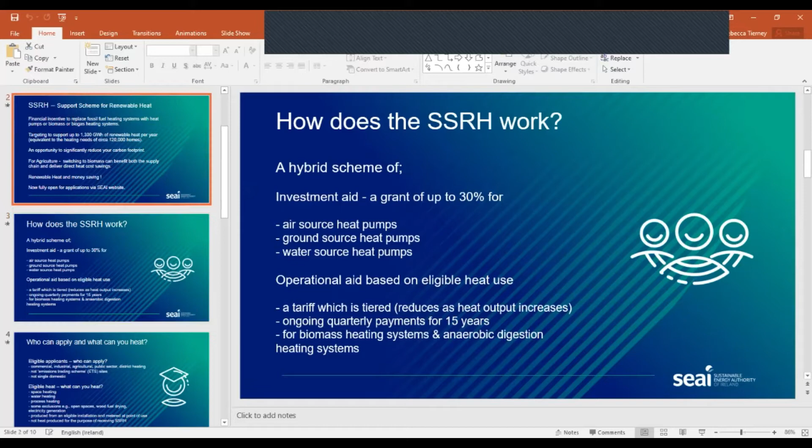So what is the support scheme for renewable heat? It's a financial incentive to replace fossil fuels.

So basically, for all you folk on the call today, if you're using fossil fuels, LPG, kerosene, anything like that, this is an opportunity to move away from fossil fuels and move to renewables. It's targeting a particular size, 1,300 gigawatt hours of renewable heat per year, which is equivalent to about 120,000 homes, or about 3% of our heat footprint. So it's a fairly substantial intervention. It's not going to be the be-all and end-all of all the heat needs in Ireland, but certainly it's a large portion of the heat, and it's an opportunity to significantly reduce carbon footprint.

For agriculture and poultry in particular, who are on the call here today, switching to biomass can benefit both the supply chain and deliver direct heat savings. So it's renewable and saving money at the same time. It's open for applications. My colleague Denis is going to take you through the application process in a few moments. But let's move on. Rebecca, next slide please.

There's actually two elements to the SSRH. We call it a hybrid scheme. There's grants for heat pumps, or there's what we call operational aid, or a tariff payment for biomass and biogas. I'm not going to talk a lot about the heat pumps here today, just to note that they're there, and perhaps we'll just park them for today.

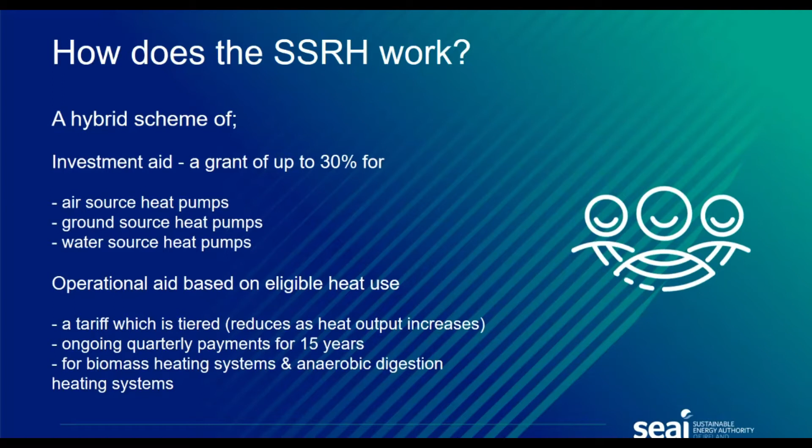Really, what's of most interest to people in the poultry sector is around using biomass, and for that there's a tariff. It's tiered, in other words it declines with size, and in essence it pays for 15 years on a quarterly basis, for biomass heating systems or anaerobic digestion heating systems. Next slide please, Rebecca.

So who can apply and what can you heat? Basically anyone in the commercial, industrial, agricultural, public sector, district heating schemes. So not big companies that are in the ETS, emission trading schemes, and not single domestic, so not individual houses or apartments. So certainly anybody in the poultry sector on the call today are eligible.

What can you heat under the scheme? Most things - space heating, that's heating rooms in hotels or offices, water heating, process heating. There are some exclusions, such as open spaces, wood fuel drying, or heat used for electricity, and not heat produced for the purposes of SSRH. So if there was never heat used for something before, just because SSRH is there, we're not interested in generating new heat sources. It must be produced from an eligible installation, and because you're going to be paid for the heat that's used, it has to be metered at the point of use. Next slide.

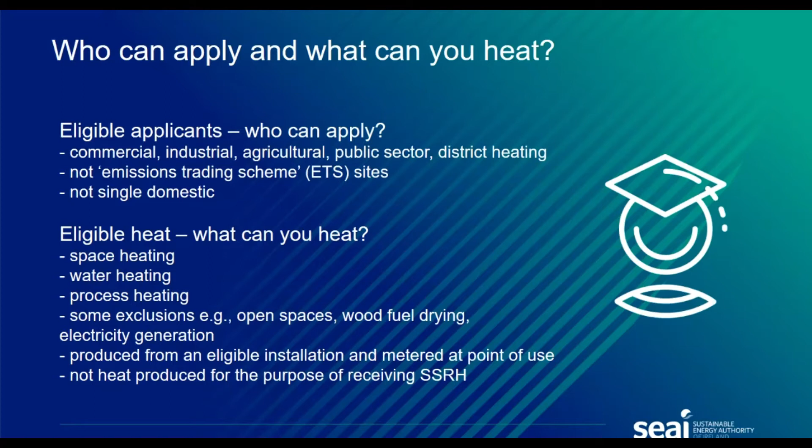So the tariff scheme, and this is the heart of it really, the tariff table. Obviously, it's paid from renewable heating systems, either existing installations - so existing poultry farms that are using fossil fuel - or new installations or expanded installations that have a counterfactual.

When we say counterfactual, what I mean by that is that there is an option. So if there's a poultry farm, for example, being extended, and you have an option to put in kerosene or LPG or biomass, then you are eligible.

This tariff table breaks down by size. So the two columns, column 2 and column 3, show the units in megawatt hours. A megawatt hour is an energy level, that's how heat is measured - in megawatt hours or kilowatt hours. For the first 300, it pays at a rate of 5.66, and then for the next 700, so from 300 up to 1,000, it pays at a rate of 3.02.

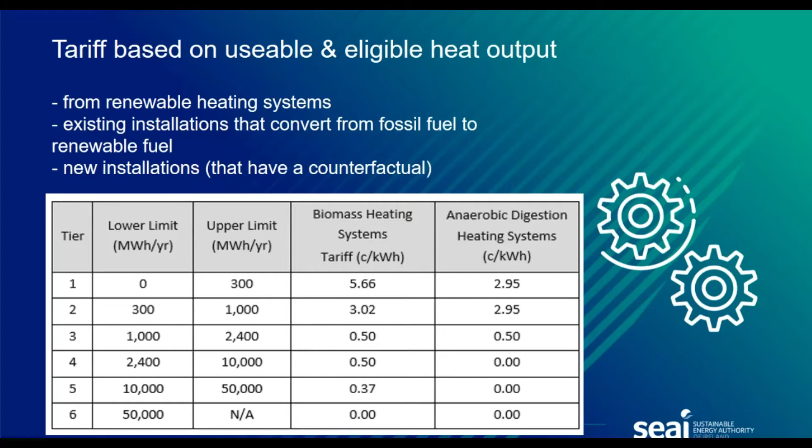You folk are more expert than I am on poultry farms, and they're all different sizes, but a lot of poultry farms we've seen would tend to come in at the upper level of tier 2, so somewhere in the high single hundreds. Could be bigger, but that's typically where they are. If we go on to the next slide, you'll see how that tariff table is applied. These figures are very much just examples - every installation, every heat use would be different. You'll have different sizes, different histories of fuel use, different outputs, and different areas to be heated.

You'll have different projects to be done. In some cases, you might have to replace the whole heating system. In some cases, it might be just replacing the boiler. So this is what I'd call a scoping, a back of the envelope exercise.

The first place to look is your heat use. Get out your fuel bills, your kerosene or LPG bills, and work out how much fuel you're using in a year. That can be converted using easy conversion tables, available on the SEAI website or on Google, which change litres into megawatt hours output.

Just watch out for the fact that the energy in oil is converted through an efficiency factor. Normally a boiler will convert roughly 75% or 80% across, but by and large it's relatively easy to do that total. This is just an example, and it doesn't matter whether it's a poultry farm or a hotel, the same principle applies.

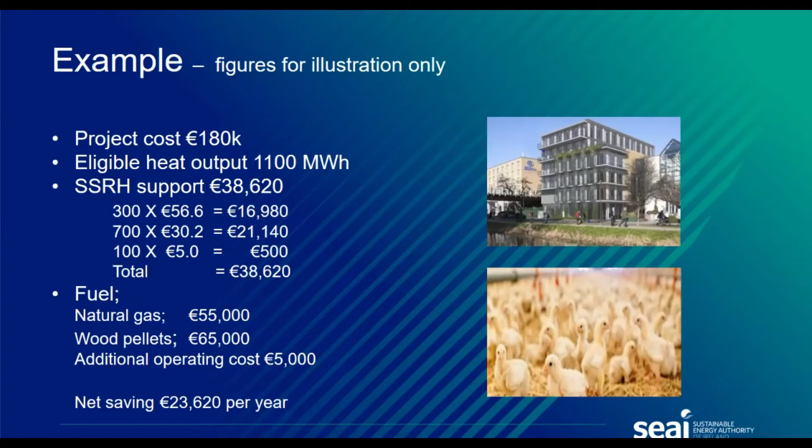The key thing, and the purpose of putting this slide up, is just to show you how it all hangs together. Do your own figures, get estimates for your own project costs, and get estimates for your own heat use and so on. Okay, Rebecca, we'll move on.

So what I've just referred to is what I'd call a scoping exercise. You could do this in the back of an envelope. It's relatively easy, and it gives you an idea of whether this is something you're interested in. If it is, you have to move to a more professional stage, and Denis will take us through this.

I don't want to steal Denis's thunder, but to go into an application stage you do need significant technical input. It's not a simple application process, not something you do in 10 minutes or even an hour or two. There's a lot of technical detail required in a design report.

You do need an energy expert to help you with those thoughts. We need to go through quite an amount of documentation back and forward with SEAI to scope out the application and the project for your size, for your application. It all hangs out of what we call the design report, so you need a design engineer to produce a design report that goes through the detail of your project.

We then move into a letter of offer stage. After the application has been successful, we will send you an offer, a very specific offer for your size, for your application, for everything that's in the design report. You go away and install it, and come back to us maybe 6-9 months later. We allow a year for it.

You come back to us and send us a completion report that gives all the technical details of everything you've done. SEAI will inspect the project, and in essence, checking back to make sure it is the project that we signed off on. And then you go into what we call a payment cycle.

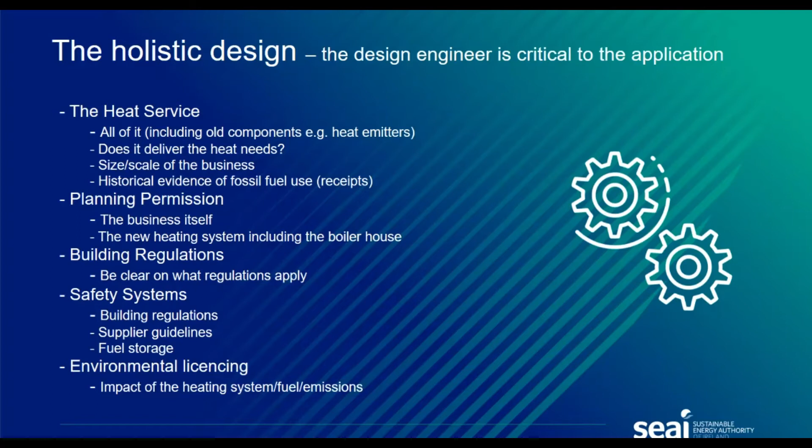Okay, Rebecca, go on again. So as I said, there's sustainability and ongoing obligations. So sustainability around making sure the biomass fuel criteria is sustainable, sourced from the right source, and so on. That if you're using biogas - I didn't go into biogas here today - that has to have come from an AD process. There's fuel quality criteria, and there's air quality standards. And then ongoing obligations around maintaining all those criteria, measuring and reporting, operating and maintaining your plant, right? Because this is a 15-year contract, and it's open to periodic inspection during that 15 years.

Okay, Rebecca, next slide. So that's really a whistle-stop run through it. There's a range of opportunities, I suppose, that come out of SSRH, and particularly for poultry. The biomass is probably the most relevant one. There are real financial savings to be made there, and it can benefit the whole supply chain. But do reach out to us. We in SEAI are very happy to help you through the process, and contact us if you have any questions.

The system is now open for application. Denis will talk that through with you.

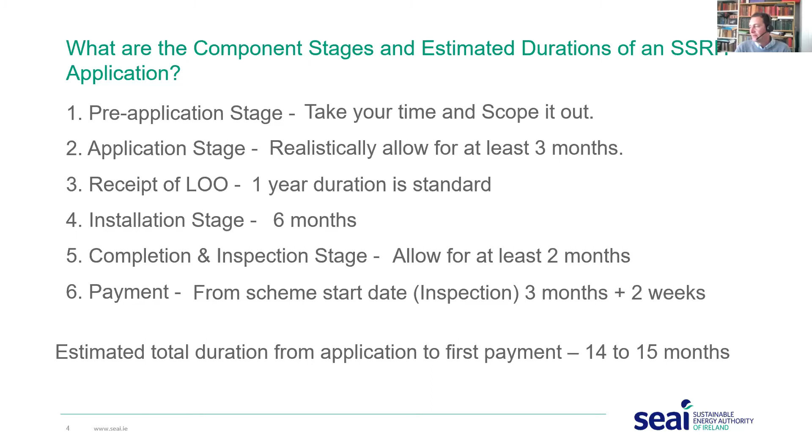So that gives us a total duration of about 14 to 15 months. But if you take from step 3, the receipt of the LOO, to actual payment, it's a period of about a year. So I just want that out there so everybody's aware, that that's the kind of duration. If you're borrowing money or something like that, it's good to know roughly what to look for.

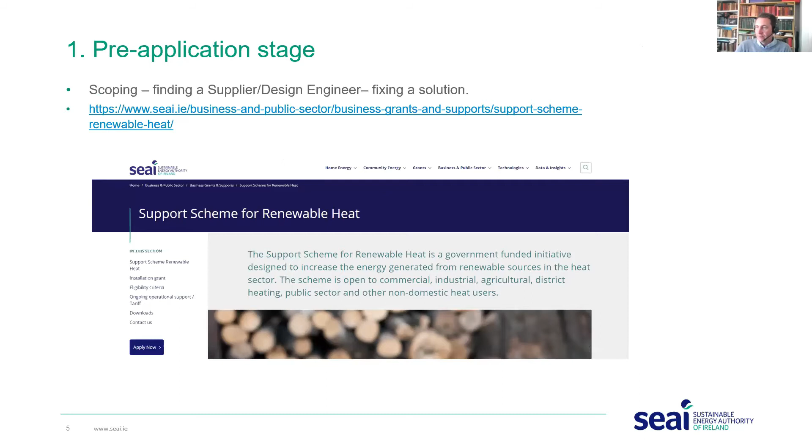The pre-application stage and scoping, the most important thing is to find a supplier and a design engineer that suits you. Like I said, go onto our website. This is, if you Google SSRH or SEAI SSRH, it'll bring you directly to this page. If you scroll down the page a little bit, you'll find the application stage documentation. There's 4 declarations there in the middle.

Have a look at them, make sure you don't fall foul of any of them. But they're fairly straightforward. If you're in the poultry industry, you should be fine.

There's 2 documents as well: the tariff scheme operating rules and guidelines, and the design report template. If you're an industry supplier of equipment, or someone who wants to be providing applications for poultry farmers, then you need to read both those documents. The design report template is probably due an update, there's 1 or 2 little changes regarding qualifications for different sizes of boilers. But you must read those 2 documents if you're going to be putting in applications for people.

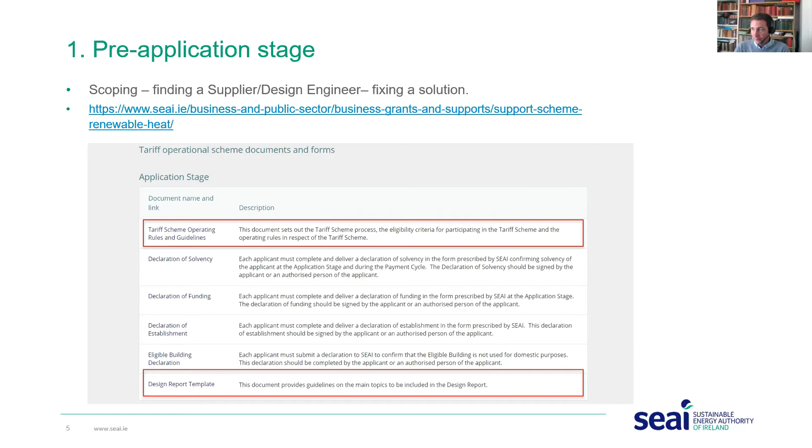On that note, if you do intend to put in applications for people, I will say that as a poultry farmer, if you pick a supplier that as part of the installation is going to do all your documentation for you, then you don't need to worry about any of this.

But if you are considering being someone who's going to put in applications, then when you go onto our website, hit the apply now button. You need to register as a user, and the user type you want to choose is applicant rather than contributor.

So I've skipped over, Ray's covered all the technical and holistic side of things, but I'm going to skip over to the LOO, because the LOO is essentially the important thing.

Like I said, it's half time in your application process, but no expenditure can take place for the project until after you receive a signed LOO. This is very important because if you do spend money, pay a deposit or something for the boiler, it means that you aren't going to be eligible for SSRH, and it would be a disaster.

So bear that in mind, be very clear on that. The letter of offer essentially is a contract. It gives you a year to complete the project. If your project is particularly large, or if it's completed in stages and you feel that a year isn't going to be enough, you should let us know. We can work with you.

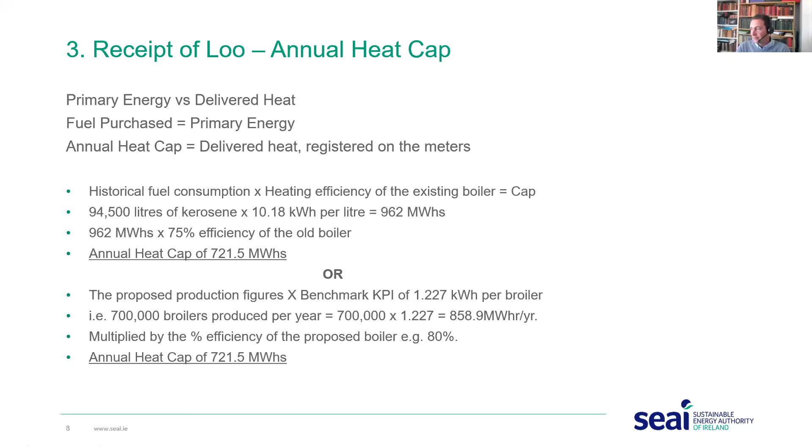As Ray was saying, when you look at it through the payment table, that would come out at about 29,700 euros to the SSRH. So that's important for everyone to understand when you're doing your scoping, to be able to work out exactly what your annual heat cap is going to be.

Ongoing obligations was the other thing I wanted to touch on, mostly because I didn't want people to think it was very arduous. I don't think they're too bad, and as I said, Martin will talk you through his experience as well.

Meter reading: when you're reading your meters, we want to see the tags on the meter. There's an example of 3 tags, one on the temperature sensor and one on each end of the calculator. There's another photograph where the screen is legible and the tags are present.

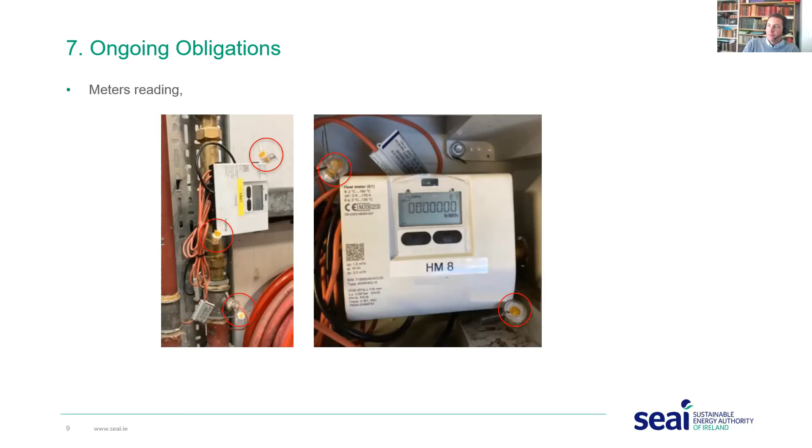So that's pretty much it. You read your meter and put it onto an Excel spreadsheet, submit that into us along with the photographs, and that's pretty much your meter read. So it's not too bad.

Fuel invoices: we recommend you have your Excel spreadsheet, and when you get in your fuel invoices, jot down the following information: invoice number, your opening stock for each quarter, or maybe not each quarter, but even your opening stock for each 6-month period, because we ask for it in the 6-month report. So: invoice number, quantity and weight.

If it's chip, the moisture content. If it's pellet, usually the moisture content is fixed. The date and the supplier name, because we need the suppliers to be WFQA assured.

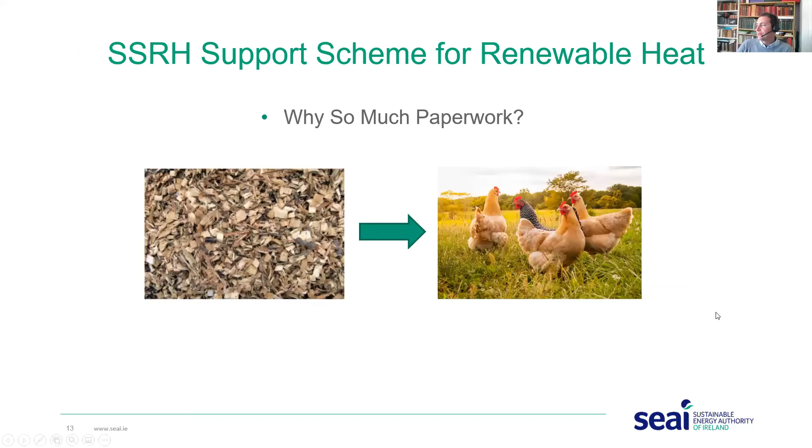Why is there so much paperwork with the SSRH? And this is the big question. We basically have a sense check system in place for the 15 years that you're going to be in operation. So we know how much fuel you're going to be purchasing because you're going to have invoices. And we know how many chickens you're going to have coming out on the other end because you're going to have receipts. We'll be reading your meter throughout the period in order to pay you.

And so we know that 1 ton of wood pellets is approximately 4,800 kilowatt hours of primary energy for a typical system. And we'll know exactly what the efficiency of your system is because we'll be basically taking the fuel and comparing it to what's going through your meters.

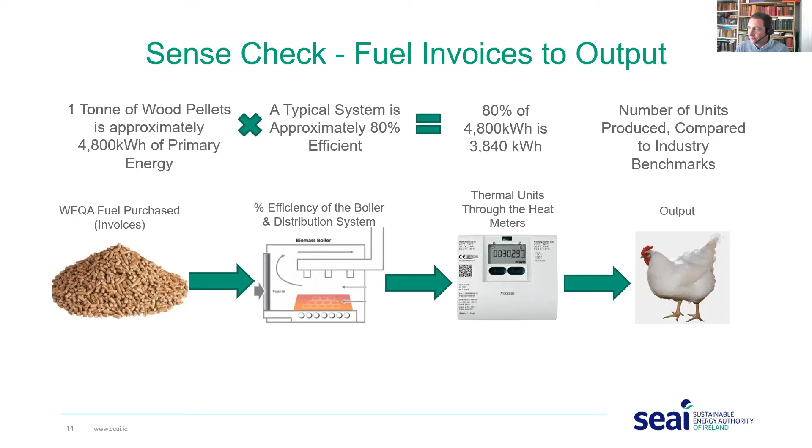So let's say that for this example, the efficiency is 80%. So we're going to know we should expect 3,840 kilowatt hours per ton of fuel purchased through your meters. And for that much fuel, we would expect to see about 3,912 birds go through your sheds.

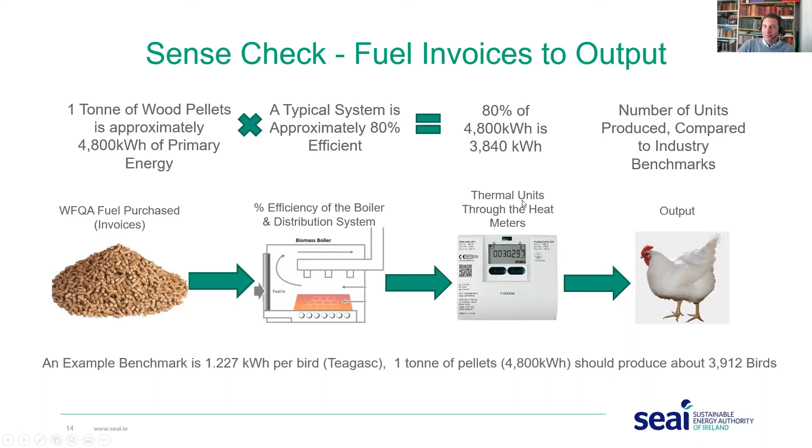So over the 15 years, we're going to know, we'll be aware if there's anything wrong. If we see this very simple comparison, 1 ton of fuel equals 3,912 birds and 3,840 kilowatt hours through the meters, that's it. So that's the thinking behind our processes.

Brilliant. Thanks a million, Denis.

No problem. That was really good to see exactly how it's worked out and the whole process throughout. So I'll ask you to stop sharing your screen. And Martin, it's your time to shine now.

So Martin, I'll just put a few questions to you, I suppose. Maybe we'll go with a kind of a tic-tac, and we can bring Denis or Ray in as we need to. So Denis, might just get you to pull down your screen there if you don't mind. Oh yeah, sorry now, you're all right. Okay, perfect, Martin, so we'll just get you to.

Brilliant, Martin, perfect. So Martin's based in Mayo. He's been supplying broilers to Western Brands since 1997. He started off with 28,000 birds in one house, and in 2001 built an additional 2 houses, both 35,000 birds. So Martin farms alongside his wife Maria and his daughters Jennifer and Rebecca. I think I got his wife's name right, I hope. So Martin, firstly, I'm just going to ask you to give us an overview of your business and the description of your business, and potentially why you looked at a biomass boiler and the SSRH for your business.